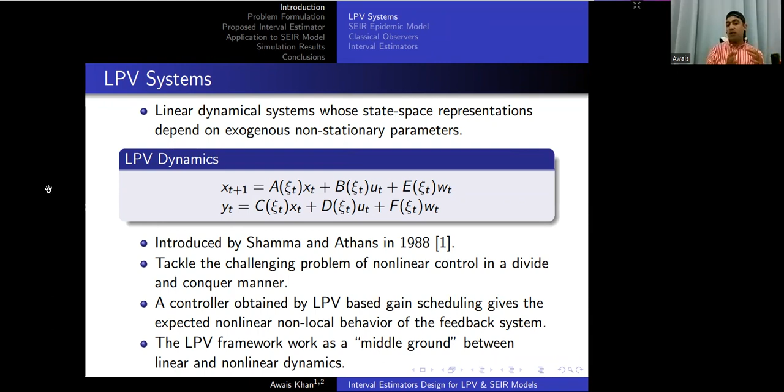So x(t+1), it is a linear discrete LPV system. x(t+1) is equal to A(ξ(t))x(t) plus B(ξ(t))u(t) plus E(ξ(t))w(t), and y(t) is our output equation, which is C(ξ(t))x(t) plus D(ξ(t))u(t) plus F(ξ(t))w(t). So if we see the given LPV model, our model is not only dependent on time, it also depends upon a non-stationary parameter, which is ξ(t).

Okay, so now we will show the connection between the linear time invariant and linear time variant systems compared to the LPV system. So it is very obvious, compared to the LTI system, that the LPV system is parameter dependent, while the LTI system is independent. It doesn't depend upon the time or anything else. So it is a very obvious difference between the LPV and LTI systems. But comparing LPV and LTV systems, the more pronounced difference is the control design or its synthesis, how we synthesize our control model for different types of systems like the LPV system.

An LTV system is a time-varying system that is dependent upon time only, while in an LPV system, the varying parameter can be anything. The LPV system is a specific class of hybrid dynamical system, just like in a switched system, the switching parameter can be anything, not only the time parameter, with the passage of time. For example, a jump system can be viewed as one kind of LPV system.

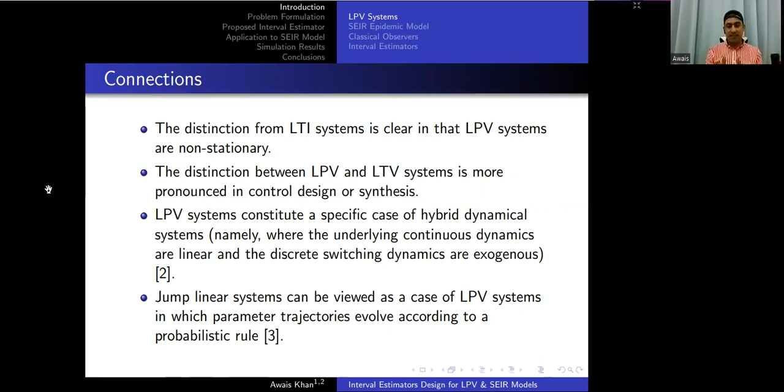So this is one of the most important uses of the LPV system, why we need LPV systems and why we need to design the interval estimator for the LPV system. There are many applications of LPV systems in real life, for example, flight control, missile autopilots, aero-elasticity, automotive systems, energy, IC manufacturing, diabetes control. All these are some specific applications of LPV systems.

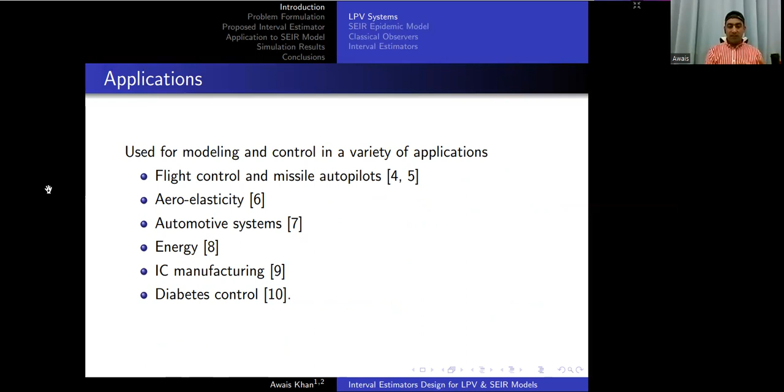Okay, the second part of the talk will be based on the SEIR epidemic model. The SEIR epidemic model is a susceptible, exposed, infectious, recovered model that was first developed by Kermack and McKendrick in 1927, and it was applied to many kinds of infectious diseases like measles, mumps, rubella, and Ebola in the 2014 Ebola outbreak in Africa.

So why do we need to design the interval estimator for the SEIR epidemic model? For example, we can take COVID-19. It is a kind of infectious disease, and it can spread very fast. So before the spreading, we need to detect how it is spreading. If we detect the outbreak, then we can make a strategy to control the pandemic or the given epidemic. For making this strategy, we need estimation tools to estimate the outbreak, and then according to the estimation, we can make a strategy to control the given model.

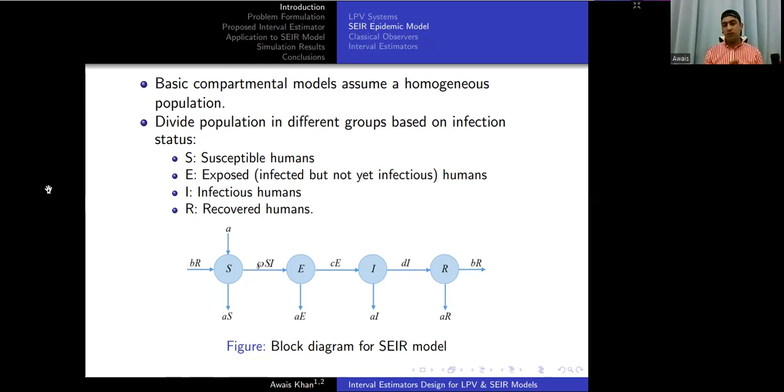Okay, so now the question is, why not a classical observer? Why do we need to design the interval estimator or interval observer? We already have classical observers like the Luenberger observer and Kalman filter. All these observers are already well developed in the research area. So why do we need to use interval estimators?

First, we need to know that if we need to design any controller, all the states of the system are not available. So in that case, we need to estimate the unknown states in order to design the controller for any kind of system. That's why we need estimation. That's why we need observers, any kind of observer. This is the importance of the observer.

And why not a classical observer? With a classical observer like the Luenberger observer or Kalman filter, when we have uncertainties that are unknown and their values are too high, we cannot get the desired estimation we want for designing the controller.

Or, for example, if you take the Kalman filter, for designing the Kalman filter we need to know the exact properties of the disturbances or uncertainties, exactly how they behave. But in many cases, we don't have the exact values of the given disturbances or uncertainties. We just know the given bound and the exact values are unknown to us. Then we cannot design the Kalman filter or Luenberger kind of observers.

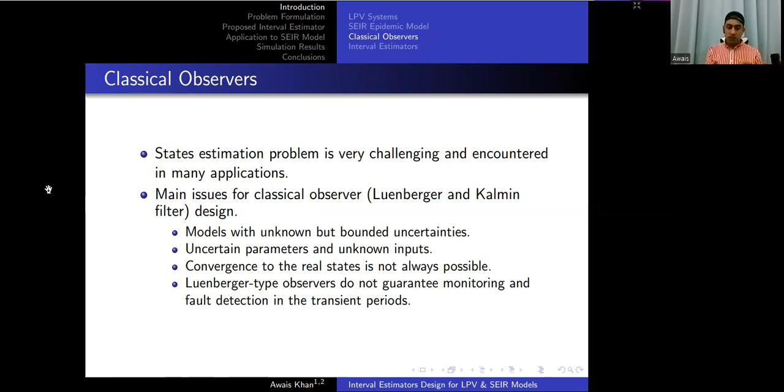So that's why we need to design another kind of observer that can handle all these problems. To solve all these problems, there is a new kind of observer, which we call the interval observer, interval estimators, or set-membership interval estimators. It is a kind of observer that generates two bounds, an upper bound and a lower bound, and the exact value of the state is always in between these two bounds.

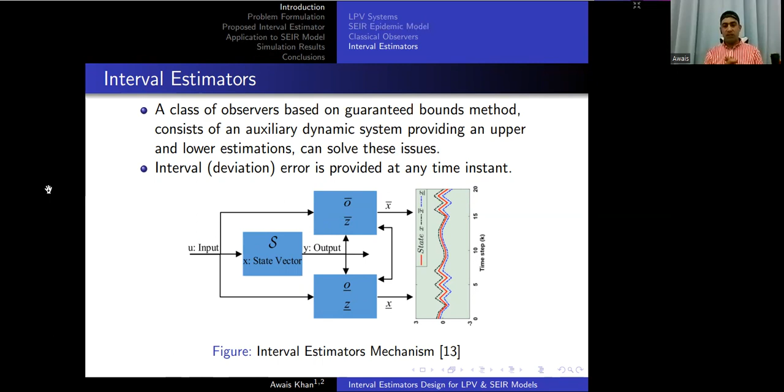It consists of two dynamic systems. One will provide us the upper bound and the other will provide us the lower bound. The deviation from the upper bound to the actual state, or from the lower bound to the actual state, will give us the interval error. So we can have the exact value of the interval error at any time instant. This is one of the advantages of the interval estimator as well. The given figure, interval estimators mechanism, shows how the interval estimator works.

To explain the interval estimator problem, we use a simple example to give a good idea how the interval observer works. We have a nonlinear system, x dot of t is equal to minus x cube of t plus d of t, where d of t is the state disturbance. The state disturbances are unknown but bounded, with minimum value -1 and maximum value +1. So the exact value of the disturbance is unknown; we only know the bounds of the disturbances, and we only know the bounds on the initial conditions. We don't have the initial condition in this case.

So in the case of a very raw design, not an observer, we just show how the intervals are generated, and how the exact value of the state will be between these bounds. If we put the maximum value of the disturbance, we get x upper dot equal to minus x cube plus 1 with initial value of +2, and for the lower bound, x minus dot of t is equal to minus x cube of t minus 1, where the minimum value of the initial condition is -2.

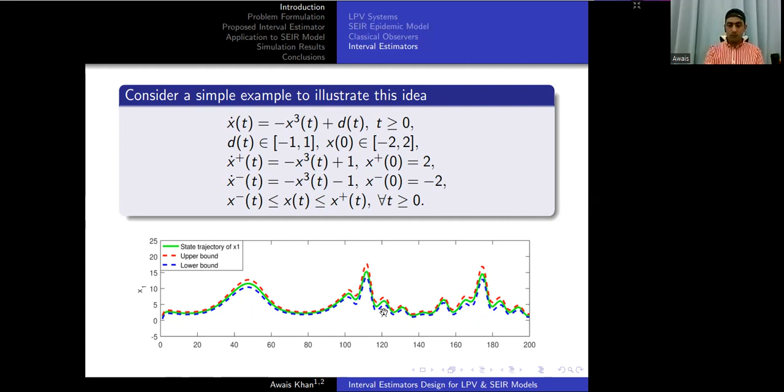Now, the interval estimators. Interval estimator has been developed for more than a decade, even more than that. So there are many interval estimator methods and techniques available in the literature. So what are we doing now that is different from them?

Mostly in the literature of interval observers, most of the techniques already exist based on monotone system theory, or you can say the system should be cooperative, or the system must be positive. If the system is not positive or not cooperative, we need to convert it to a cooperative system by a technique known as transformation of coordinates. So in order to design the interval estimator, our system should be cooperative or at least a monotone system.

This is very restrictive for designing an interval estimator, because in real cases, not all systems are cooperative or positive. So for that purpose, we transform the system using a transformation of coordinates to make it cooperative if it is not. But this is also not always possible, or it is time consuming and very difficult to get the transformation of coordinates, especially when the systems have a lot of states, like about 20 or 30 states. In that case, the transformation of coordinates can be impossible or too difficult to obtain.

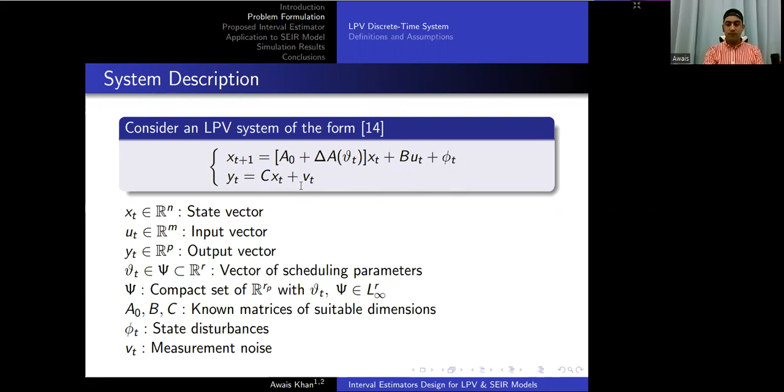Before going to design the proposed interval estimator, we need some definitions that need to be known, and we also need some assumptions in order to design the proposed interval estimator.

So what is an interval vector? Just to recall some definitions: an interval vector has a minimum value and a maximum value. So we have a value x such that x is greater than the minimum value and x is less than or equal to the maximum value. This means that any value in between these two bounds, the maximum or minimum value, will lie inside the vector.

We will need these two interval widths in the proposed technique, so that's why we define these widths here. For a scalar, if we have any scalar value, the width should be the maximum value minus the minimum value, which gives us the width between these two scalar quantities.

In order to get the width for the vector, the maximum value among all these scalar intervals will give us the interval width for the given vector. So we need to check the scalar interval for each and every point, and the maximum value of these scalar intervals will give us the interval width for the given vector.

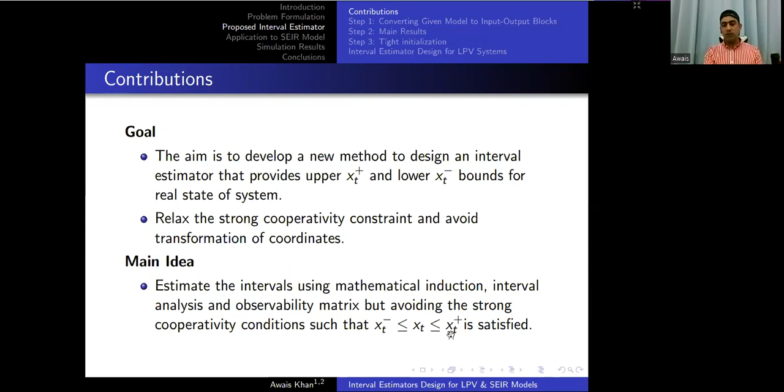So the first step for designing the proposed interval estimator is that we need to convert the given model into input-output blocks. The above LPV system can be written in this form: x of t plus n, where n represents the size of the model. It can be anything, n is 1, 2, 3 -- it is the dimension of the given system, so it can be any value.

So x of t plus n is equal to lambda of a x of t plus lambda b sigma of u from t to t plus n minus 1. Sigma y of t to t plus n minus 1 is equal to lambda naught x of t plus lambda c sigma u of t to t plus n minus 1.

We will define these matrices one by one now. Sigma u will represent the input matrix from u of t to u of t plus n minus 1, so it will contain n blocks of the input vector. And sigma y of t plus 1 to t plus n minus 1 represents the n blocks of the output vector, y of t plus 1 to y of t plus n minus 1.

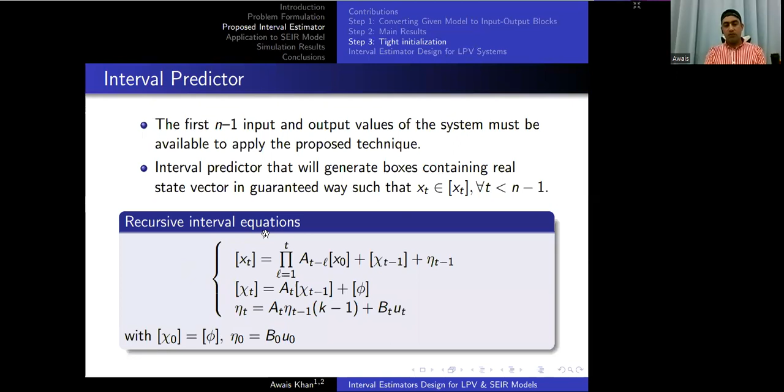So the interval width for step 3 will be: width of xt minus up to, it is an interval vector, which is less than or equal to the product of L equal to 1 up to t, of a(t minus L), this infinity norm of this matrix, into width of the initial value plus width of chi(t minus 1). This is the interval width for the interval predictor.

This equation is the interval width for the interval predictor, that is for all t less than n-1. And the interval width for the proposed interval estimator, given here, we need to show that the interval width of this equation is always less than this one.

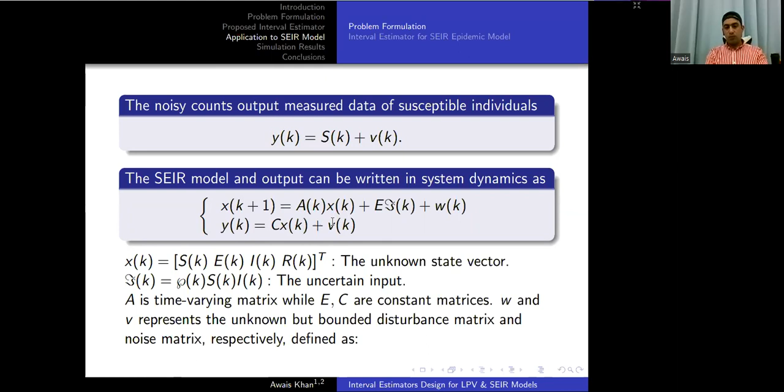So from here, y of k is equal to C x of k plus v of k, we can write y of k plus 1 is equal to C x of k plus 1 plus v of k plus 1. And we can put the value of x of k plus 1 here, so we will get this equation. After solving this equation and putting these values, C and E are constant vectors. If we multiply CE, we will get -1, and C w of k, we will get a of k.

And putting all these values, finally we'll get zeta, because in this matrix all values are known except zeta. So we will get zeta of k is equal to C A of k x of k plus a of k minus y of k plus 1 plus v of k plus 1. And then we can expand this into upper and lower bounds and put here.

So the upper bound of zeta of k will be equal to CA positive x up of k minus CA negative x low of k plus mod of minus y of k plus 1 plus v up plus A up. And similarly, zeta low is equal to CA positive x low of k minus CA negative x up of k plus mod minus y of k plus 1 minus v up plus A lower.

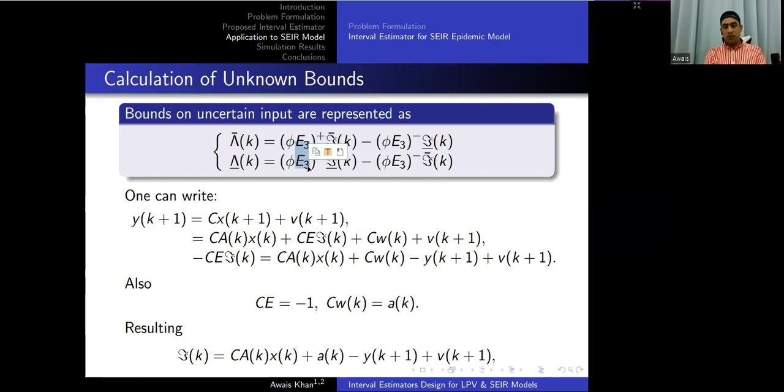And such that we see that zeta of k will be between the lower and upper bound. It will be inside this. This represents upper and lower bound. And E3, where we put here E3, which will be equal to E and E, because all the system should be in the same dimension to get the products of the vectors and matrices.

Okay, now we need to know the bounds of the unknown birth and death rate. We calculate this one now, and then next we will calculate these bounds. So bounds on the unknown birth and death rate are given by D up, which is equal to phi plus of k W upper bound of 3 plus phi minus W lower. Similarly, D low is equal to phi positive W lower of 3 plus phi negative W upper of 3. Now these W of 3 represent a 12 cross 1 matrix, because our system is of 4th order.

So these denote the concatenation on the uncertain birth and death rate. That's why we say that the state disturbance is n-1 concatenation. So it represents the n-1 concatenation. W3 upper is equal to W upper and W upper. Similarly, W3 lower is equal to W lower and W lower. These are the minimum values and these are the maximum values.

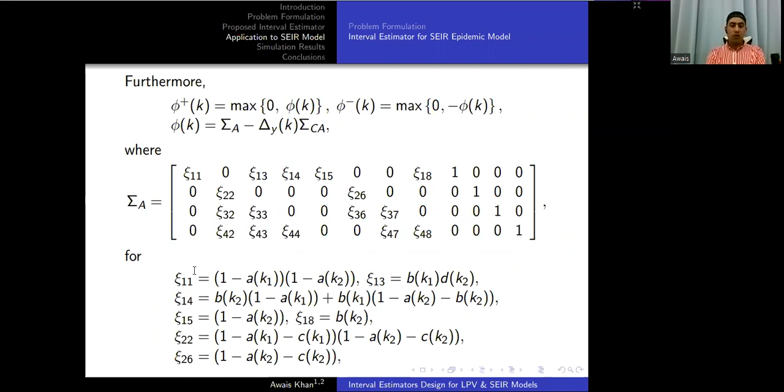Similarly, sigma CA will represent this matrix, where 0 4 cross 1 means a zero vector of dimension 4. And this will be a 12 cross 3 matrix, with k1 equal to k minus 1 and k2 equal to k minus 2, because the matrix is too big. So that's why we put k1 and k2 here, just to make it short, so it will fit inside the slide.

Similarly, we need to know the upper and lower bounds on the measurement noise. V up is equal to phi positive V of k V up of 4 plus phi negative V of k V lower of 4. Similarly, V lower is equal to phi positive V of k V lower of 4 plus phi negative V of k V up of 4, where V4 represents the n concatenation of the measurement noise vector, which is 4 cross 1. V4 up is the maximum value of V, and V4 lower represents the minimum values of the n concatenation of the measurement noise vector.

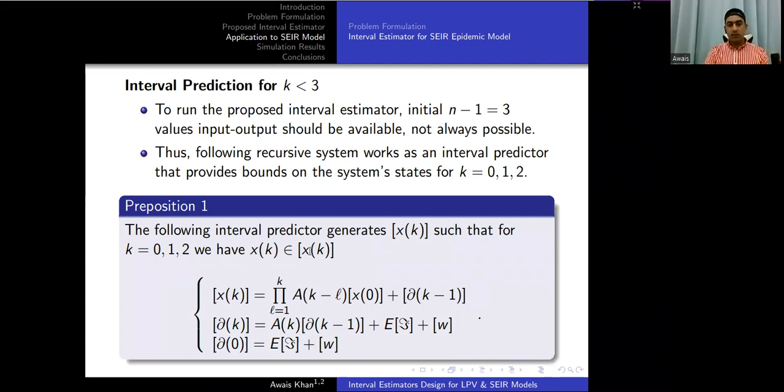Okay, we didn't show proofs of this theorem, this interval predictor, and this finite-time convergence for two reasons. Reason one is that it is almost similar, not exactly similar, to the LPV system. And number two, these results are not yet published, so we are waiting for that. It is under review, accepted with minor revision.

Okay, now for any design method, if you design an interval estimator or controller, we need to show the performance of the proposed technique compared to other techniques, and how it works. So we use two examples. One is for the LPV system, and the other is for the SEIR epidemic model.

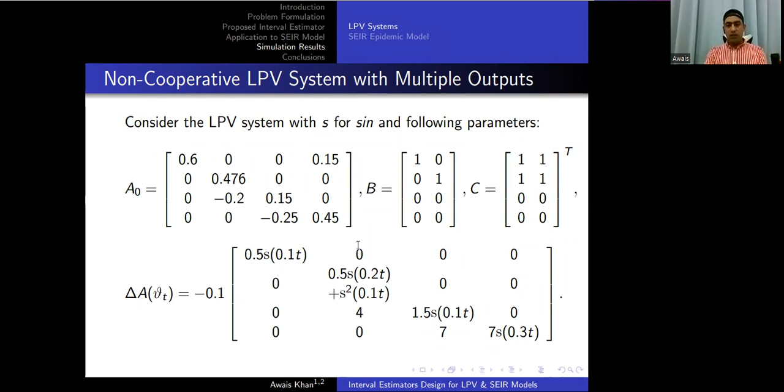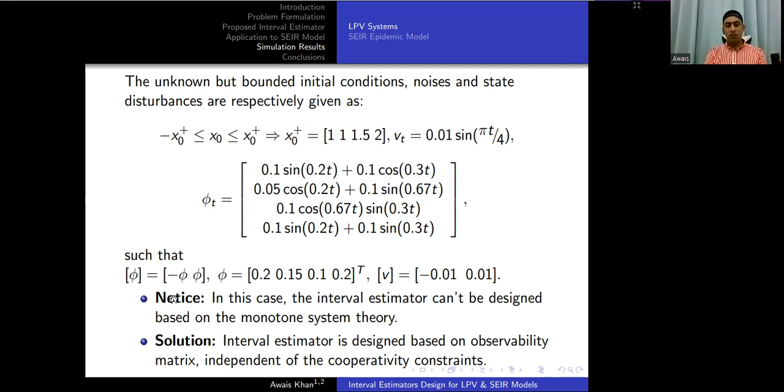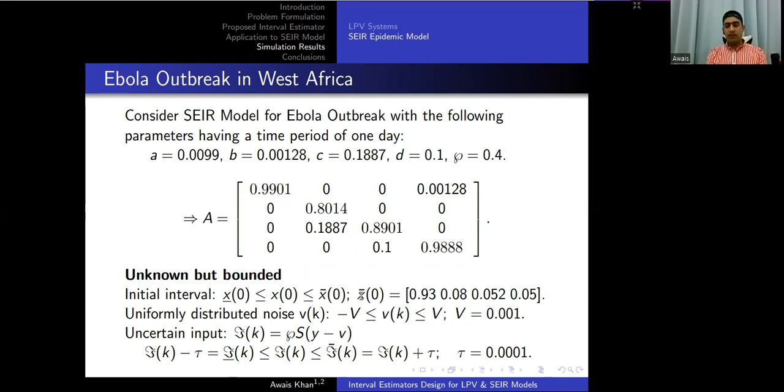The Ebola outbreak came into West Africa. So where A is equal to these transition values. A is the matrix with unknown and bounded values, and these are the initial conditions. These are the measurement noise, which are unknown but bounded.

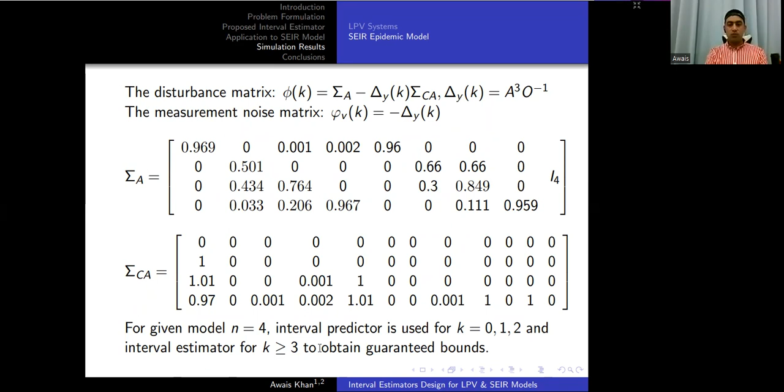So after simulating all these equations, we get these matrices in order to run our proposed interval estimator. The system is of order 4. So first we use the proposed interval predictor for k equal to 0, 1, 2, and after that we use the proposed interval estimator to get the guaranteed bounds. We compare our proposed method with the SEIR epidemic model interval estimation given by reference 16.

Finally, we came to the conclusion. We proposed the interval estimator for the LPV and SEIR epidemic models that are subject to disturbances and measurement noises. The proposed method is designed on the observability matrices. That's why we use the observability matrices, in order to avoid the strong and strict cooperativity condition. And we also save computational time.

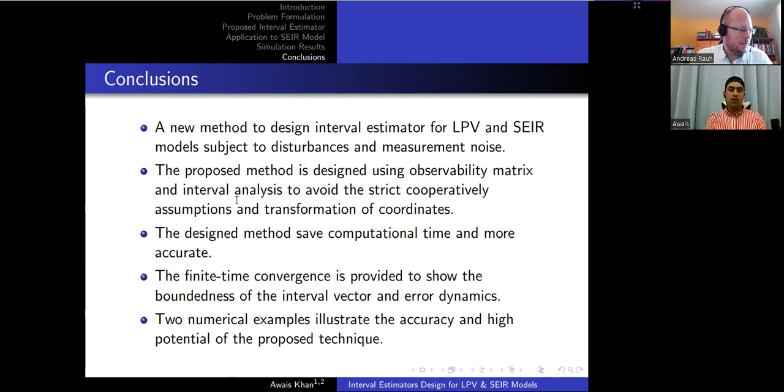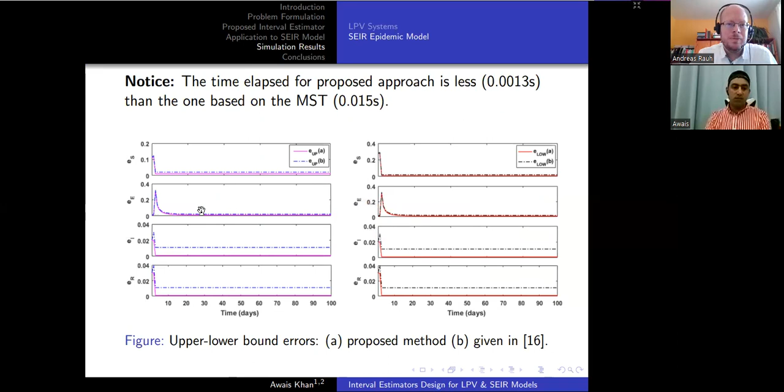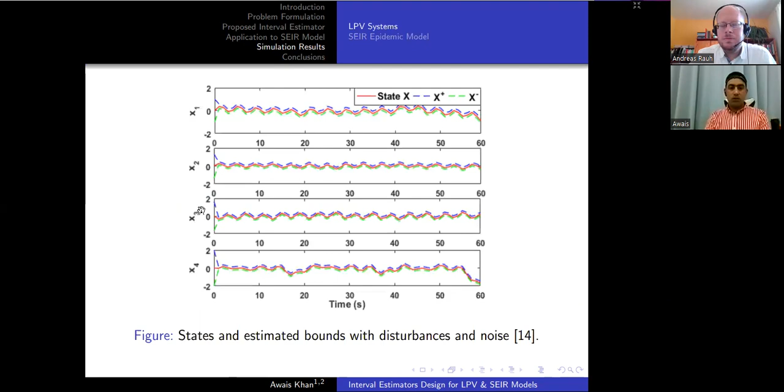It's true that we don't have an observer gain to tune our observer in order to show the stability exactly. But if we see from here, we show the stability of this system in terms of the interval width, and we also simulate the width stability in our simulation. From here, the width of the generated bound is always less than the infinity norm of the interval predictor, because, as we mentioned, if we know the first n-1 values, then we can apply the proposed interval estimator.

If in some cases we don't have the first n-1 values, we need to run the interval predictor. So we also need to show that the width of the interval predictor is bounded and is less than the norm of the measurement noise and the disturbances. And similarly, for the proposed interval estimator, the width of the estimated bounds is always less than the infinity norm of the measurement noise and state disturbances that we already calculated.

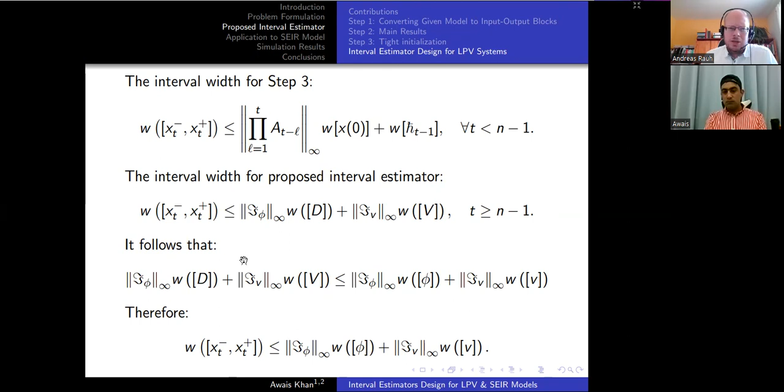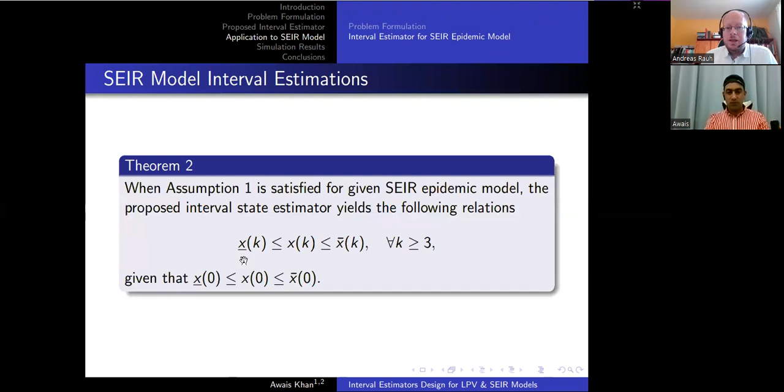No, if we see the simulation of the system... Yes, but your system is open loop stable. You have some stability of your open loop dynamics. But what would happen if your system matrix A in the discrete time model contains eigenvalues outside the unit disk?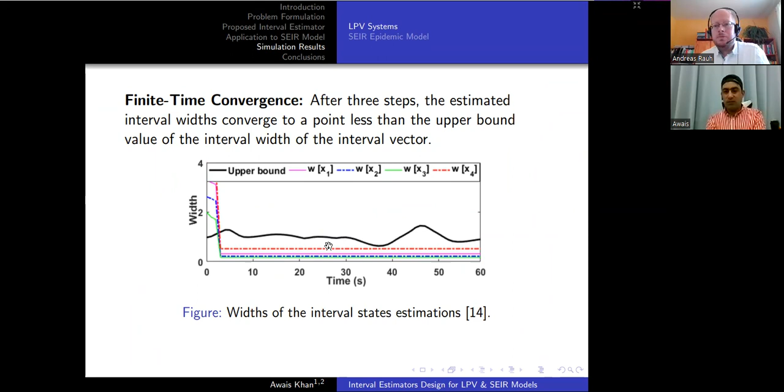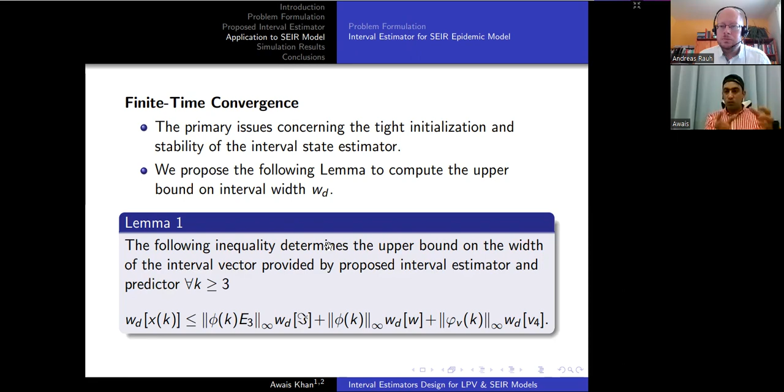Then maybe you are right that if we multiply different matrices, it will make a problem. But the thing is that we are just using the state disturbances and measurement noise to generate the bounds. We didn't use the matrix A or any other matrices to generate the bounds. The matrix A and the states we just use to generate the input and output blocks. Let me show you.

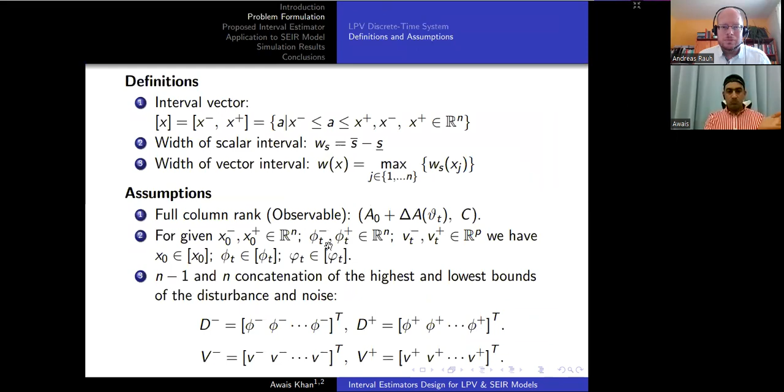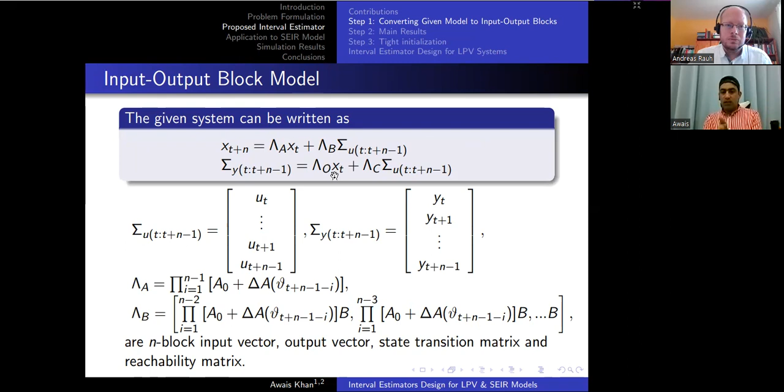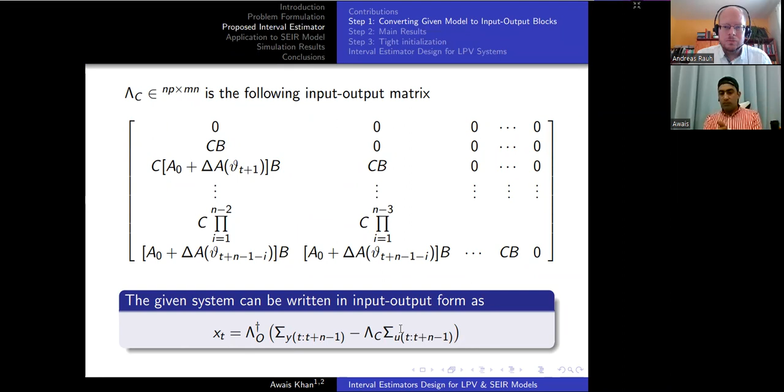Just like here, we just convert the same model into input output blocks, and from these input output blocks we just get this state. From here we get this state; these are the output values, these are the input matrices, and finally these input output blocks we use to estimate the states. So this is almost exactly the same system, we just transform the same system into the input output blocks.

So I don't think it has any problem with the matrix A. Yes, and since you just showed this generalized inverse of the observability matrix here on this slide, if you have uncertain parameters in the matrix, how do you define this pseudo inverse? The uncertain parameters where? Yes, the matrix lambda O. The matrix lambda O depends on your system matrix, on your dynamics matrix A. Okay. You have uncertainty in the matrix. This matrix lambda O is an interval matrix.

Uncertainty where? You mean this delta matrix? No, the matrix lambda O. Yeah, this one. Yes, this one. It depends. This is the generalized. Yes, it depends on the system matrix. And if you have uncertainty in the matrix, you have to compute the pseudo inverse of an interval matrix. How do you do this? Because I think this strongly suffers from the wrapping effect of interval analysis.

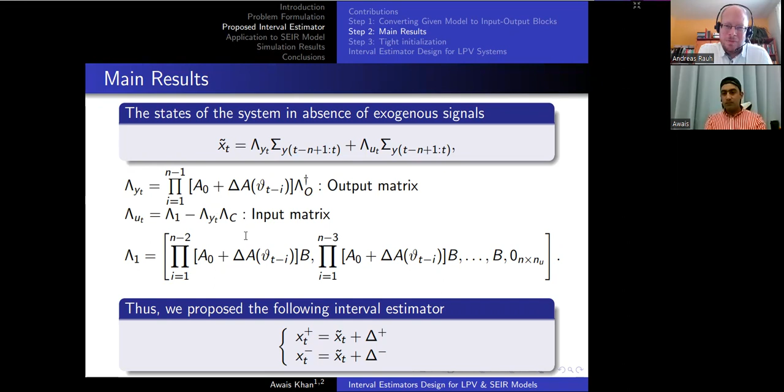Yeah, but in my case I didn't take the uncertain parameters in the input matrix A or C, because they are just known matrices, and there is no uncertainty in these matrices. Yes, but frankly speaking, for example, for this epidemics model, you have quite strongly uncertain dynamics. No, in epidemic models, here we see that the values of A are uncertain, but they are bounded.

Yes, but then the observability matrix is again an uncertain matrix, which is bounded, and you have to compute the inverse. Yeah, we need to, but it just transforms this matrix A into a linear time variant, LTV type system. It doesn't make it unstable or something like that. Even I say here it is a time varying matrix, because we know the values of A, B, C are bounded values, not the exact values.

Yes, they are bounded, but is it really guaranteed that the matrix stays invertible, just by multiplying uncertain parameters at the end? Yeah, maybe. I think it's not purely the observability criterion, but really invertibility of the observability matrix under the constraint that you have multiplied already some interval matrices. Yes, it's true. It's not that the system should be fully observable. Full column rank observable is also okay.

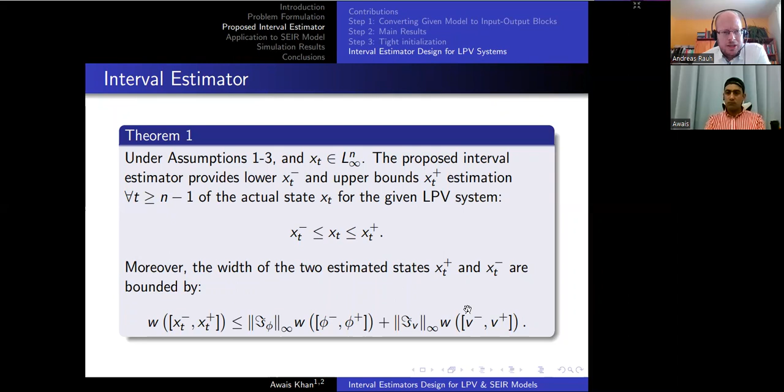In your epidemics model, you assumed, thinking of the output equation, this proportion of the population of the susceptible as humans or whatever species here. You assume the output equation is directly a measurement of S plus some additive disturbance or uncertainty. Typically you may underestimate or overestimate the percentage of susceptible species. What would happen if you have a multiplicative parameter in the output equation, a parameter multiplied with S?

Where this parameter is some interval quantity, meaning you have some unknown percentage at the end that you cannot quantify directly. So would your approach still work, or what's your recommendation?

I didn't work on it, but because I take this model from the Ebola outbreak, they use the same model for their epidemic model. In my case, the susceptible individual represents those we don't know - how many people recovered, how many infected, or how many are exposed.